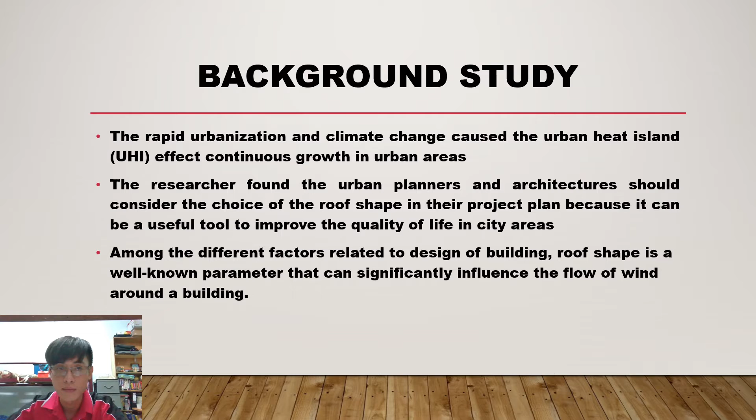For the problem statement, the urban heat island effect or heat stress is associated with the urban area due to continuous urbanization and global warming. There are many factors that can cause this urban heat island to happen.

Low wind speed occurs around buildings at pedestrian level due to higher packing density, so the released wind from buildings becomes lower. This is because the heat cannot release from the building, making it feel very hot, especially during the night.

That is the reason we have to consider that roof shape will contribute positively to the wind condition at the pedestrian level. So for the purpose of this study, the roof shape design towards pedestrian level wind speed will be taken as the main element in this research.

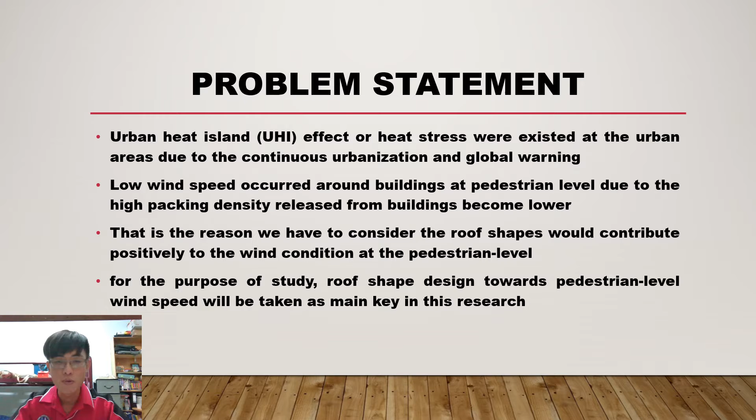For the rationale and significance of study, this study is necessary. It is with the purpose to determine the optimum design of roof shape toward the pedestrian level wind speed on multiple building areas and also isolated building areas.

This paper contributes to the area of research by exploring the roof shape application in order to improve the pedestrian level wind speed around buildings.

The most suitable design of roof shape can make a contribution to the field of construction because its benefits can improve air ventilation around buildings, mitigate heat stress and the urban heat island effect in tropical regions, and increase pedestrian level wind speed around buildings.

So after solving this problem, we can feel cool, and we don't feel as hot, especially in the afternoon or at night.

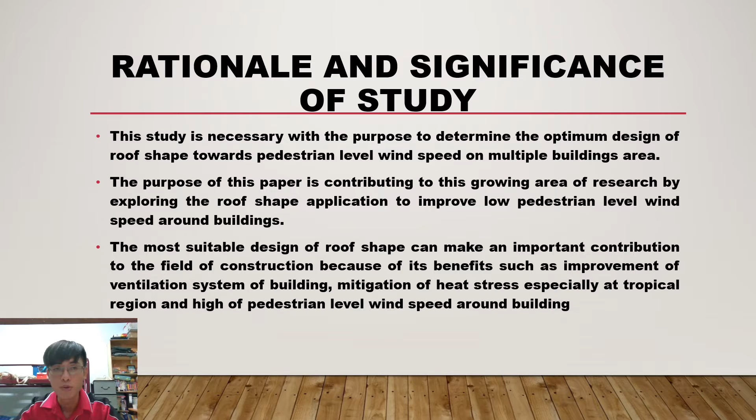For the objectives of the research, the first is to identify the roof shape design affecting pedestrian level wind speed. The second is to investigate the effect of different designs of roof shape towards pedestrian level wind on multiple building areas by simulation using CFD software.

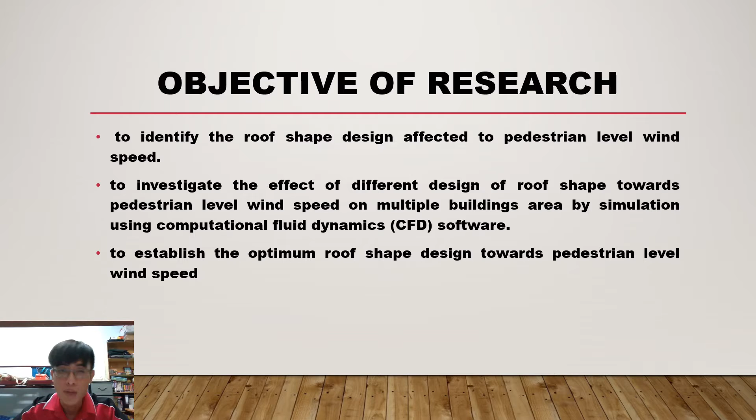The third is to establish the optimal roof shape design towards pedestrian level wind speed.

For the scope of study, we want to evaluate the effect of different roof shape designs on pedestrian level wind speed around educational buildings. So we have to do the analysis of different roof sheds on the building at the pedestrian level wind speed.

It is assumed that the standard K-epsilon turbulence model is adopted and 0 degrees for the simulations. In particular, the topographic map in this study is assumed to be a flat surface, and the static condition assumes no green environment and no human beings respectively.

The model scale for this study is not possible to explore the urban area at large scale. This is because of the requirement of advanced technology, such as higher computational cost.

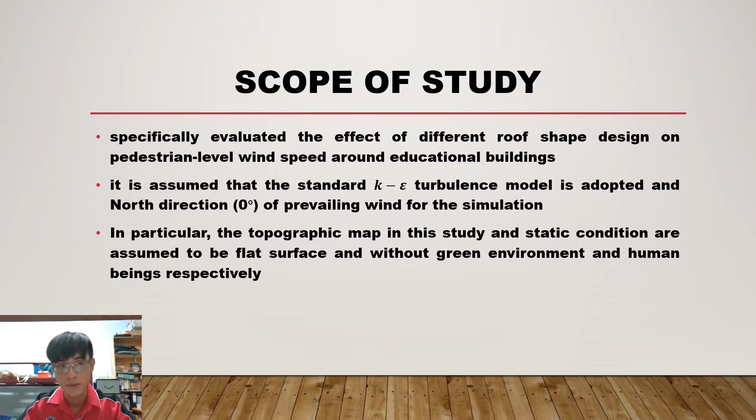For the literature review, we look at the advantages of roof shape to pedestrian level wind speed. First, the roof is an important element of building because it protects us from exposure to sun and rain. Therefore, a number of resources have reported that wind conditions around buildings at pedestrian level are affected by roof shape. From this, we know that roof shape can bring effect to the wind condition around buildings.

Research also concluded that roof shape significantly influences the flow topology and turbulence, meaning the wind direction and flow pattern around buildings. Based on the perspective of the urban wind environment, it has been established that the roof shape of a building distinctly affects the surrounding wind environment.

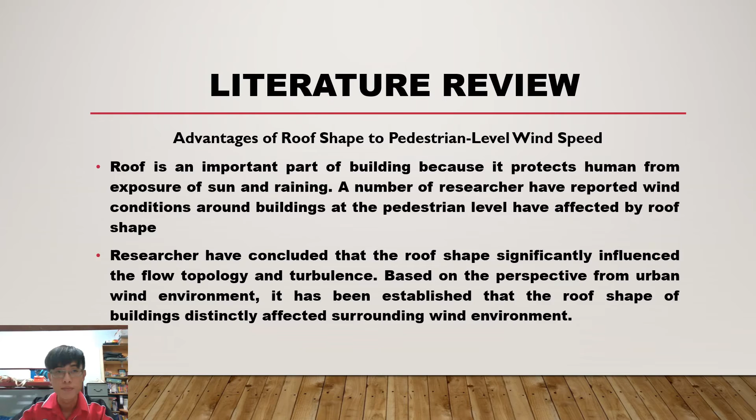So there are many types of roof shapes that can influence the pedestrian level wind speed. There are a few types of roof shapes that I found in the research.

The first one is the gable roof. A gable roof is a type of roof design where the wall slopes upwards towards the two sides, as shown in the diagram above. That enhances effective air exchange between buildings and increases the turbulent kinetic energy. By increasing the turbulent kinetic energy, the wind flow becomes higher.

It can improve the air ventilation between buildings. It has been reported that the performance of a gable roof with a critical roof angle of 45 degrees was the best option for ventilation compared to the flat roof. So it seems that the gable roof is better than the flat roof in improving air ventilation at pedestrian level.

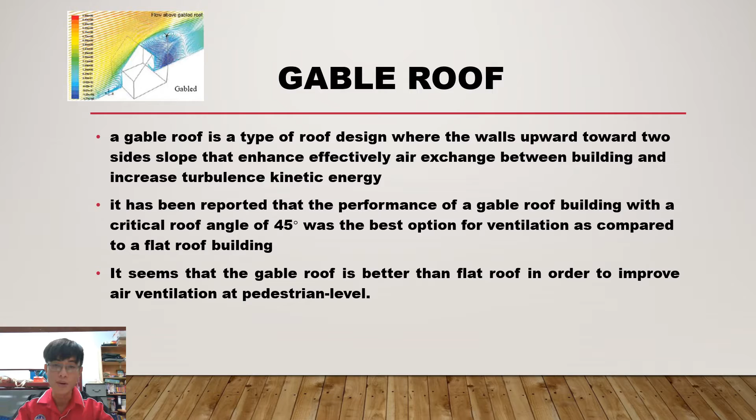So flat roof is another type that I found. Generally, flat roof or low slope roofs are commonly used for commercial buildings throughout the world. If we travel anywhere, we can find that flat roofs are common, along commercial buildings and other places.

It's concluded that flat roof buildings at street canyons can improve ventilation in urban areas. This is the conclusion from the research. Almost all previous studies used flat shape designs for their models in order to carry out the analysis of wind flow. This is also from previous studies.

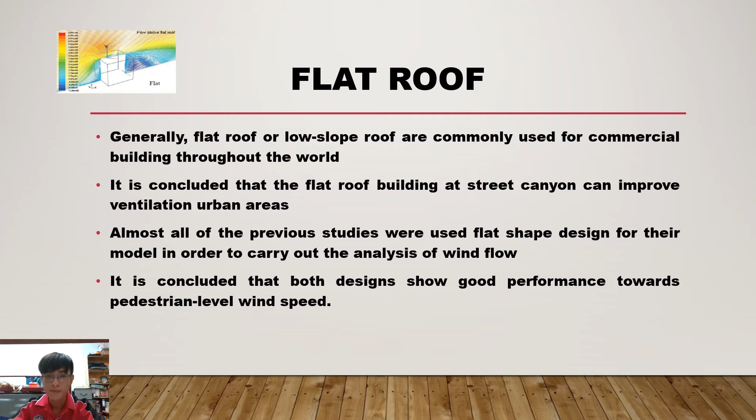So this is another type, which is a circle, and we call it a dome roof. Unfortunately, there are only a few published studies focused on the analysis of dome roofs. One research mentioned that a cylinder wall with a spherical roof was identified as the optimum shape for wind energy exploitation around buildings.

Another research concluded that ventilation flow becomes lower and lacks thermal comfort due to the increasing height of the dome shape. Based on these two research, their opinions are different. So it can be concluded the positive results were due to the data taken on top of the roof and not applied at pedestrian level wind speed.

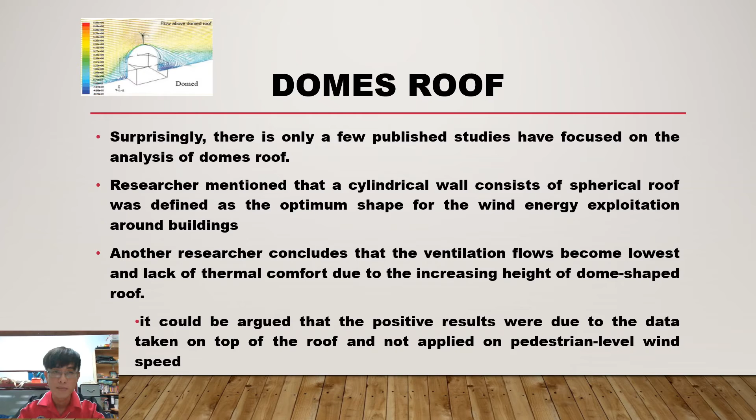Another type of roof we call a pitch roof, is a triangle, and is a type of roof comprising a sloping surface with an angle usually over 20 degrees. Prior studies concluded that pitch roofs can increase the rate of air exchange between the urban area and the outer flow in order to improve thermal comfort. There has been little agreement that pitch roofs can improve wind speed at pedestrian level, though this is due to only a few published studies having focused on this type of pitch roof.

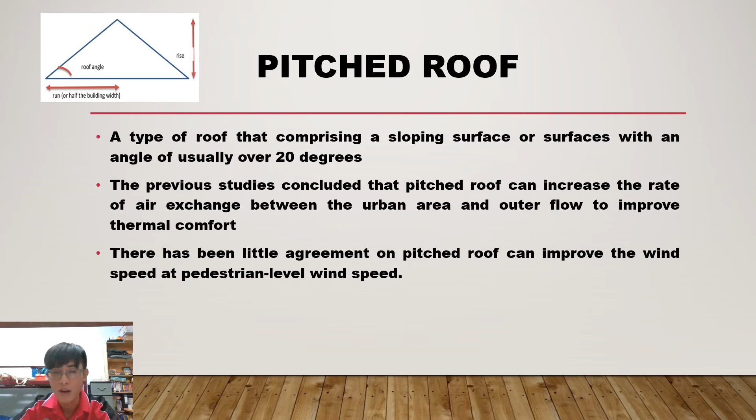This is another type, the step roof, where the surface on one side is higher than the other side. Based on table 2.1, which is the figure shown, it shows that the mean velocity of step roof is lower compared to the other two types, flat and gable. So we conclude that the performance of step roof is poor towards pedestrian level wind speed.

There is only a little research focused on this type of step roof. It would be more beneficial if more research focused on this type of roof shape in order to establish good performance towards pedestrian level wind speed.

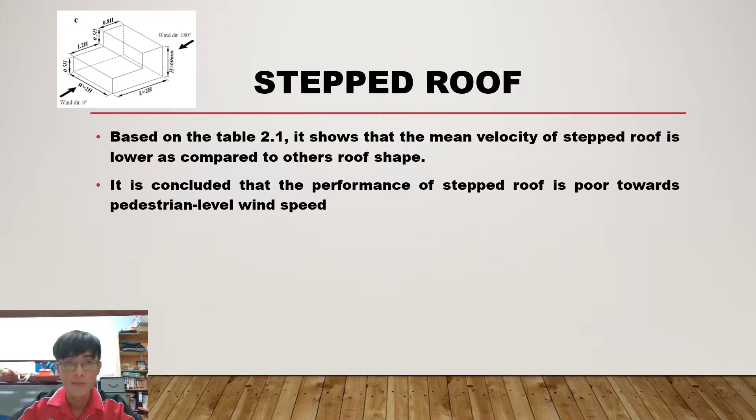This is another part from the literature review, the roof design parameter. There are basically four categories. The first one is building configurations and designs. Building configuration is defined as the overall size and shape of buildings. We can note that the roof shape of a building can be categorized in building configuration because it brings effect to the pedestrian level wind speed.

Recently, research has shown an increased interest in investigating the effect of height of a flat shape building on the pedestrian level wind flow. Another is the roof pitch slope design, which can influence the pedestrian level wind speed. Several studies have documented the analysis of wind flow around buildings with different degrees of roof pitch.

That shows the significant influence on the pedestrian level of building. It has been reported that the performance of a gable and pitch roof building with a critical roof pitch of 45 degrees was the best option to improve the pedestrian level wind speed.

The other factor is roof height, the rise-over-run ratio. In a study conducted by Hosseini 2017, it was shown that the presence of vortex and buoyant force occurs when the rise-run ratio, the roof height, is increased. The presence of buoyancy can lead to an increase in turbulence kinetic energy, which can improve air ventilation. There still needs to be more exploration of the rise-over-run ratio on pedestrian level wind speed, as only a few studies have focused on roof height.

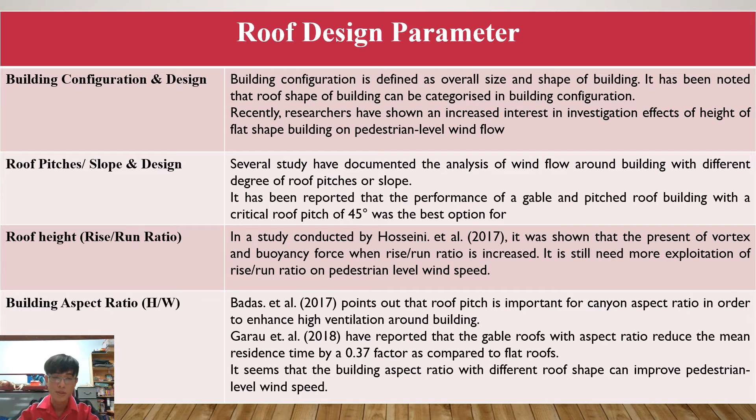The benefits of good roof shape design: the first is higher wind speed, or improved air ventilation. Hosseini's comparative study found that increasing the roof height and the presence of buoyant force can improve thermal comfort due to increased turbulence kinetic energy, raising wind speed around the building. Another study mentioned that flat roof buildings in a street canyon perform well to improve ventilation in urban areas.

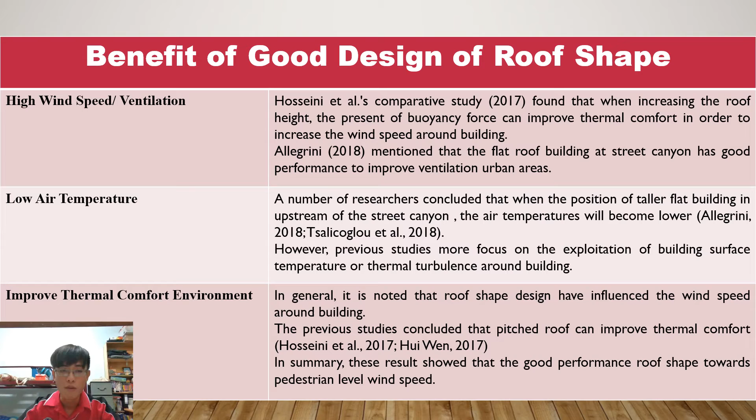Another advantage of good roof shape design is improved thermal comfort environment. In general, roof shape design can influence wind speed around buildings. Previous studies concluded that pitch roofs can improve thermal comfort, according to Hosseini and Hui Wen 2017. In summary, these results show the good performance effect on pedestrian level wind speed.

Pedestrian level wind speed, this is in chapter 2, the literature review. The key factor affecting pedestrian comfort is the wind environment surrounding the building. Moreover, Liu has reported that the mean wind velocity ratio is used to evaluate the wind environment at pedestrian level. The condition of surrounding wind at pedestrian level is affected by roof shape, so we know that roof shapes can bring effects to pedestrian level wind speed.

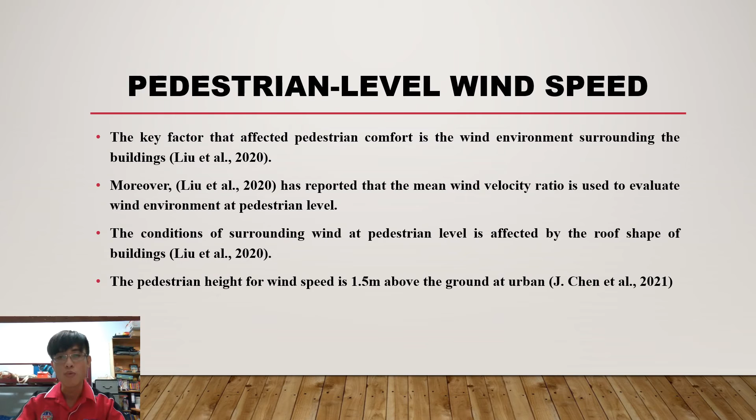The pedestrian height for wind speed is 1.5 meters above the ground in urban areas. So this is the pedestrian height, and we know that the limit is from 1.5 until 2 meters.

For computational fluid dynamics, in recent years CFD has successfully contributed to the application of wind flow around buildings by providing a suitable way for determining mean flow conditions. This shows that CFD has very good performance in predicting the analysis of velocity around the building, and it can also provide detailed data on energy levels around the building. So it is a powerful tool for the analysis of a building.

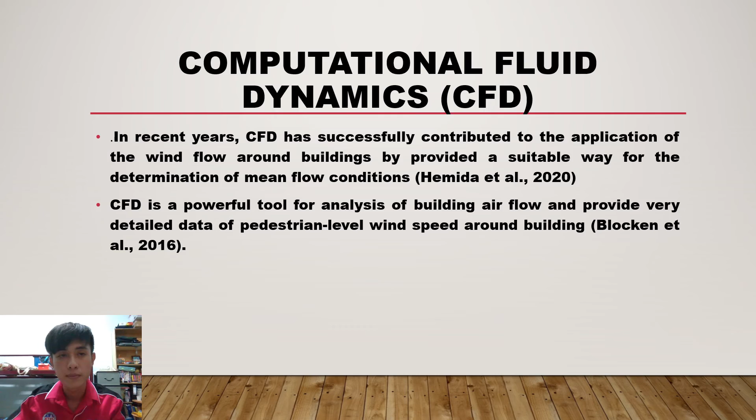For methodology, the figure below shows the methodology chart of the study. The first step is site selection, so we have to select the site for this study. I selected the campus Pagoh UTHM as my site to analyze the wind speed.

This is because the buildings at Pagoh, with their height, capacity, and building arrangement and shape, can be matched with urban areas. The next step is roof building identification, so based on the buildings at Pagoh, we have to identify the roof shape of the buildings.

For the building plan of the buildings at Pagoh, it is taken from the website WikiMap.

So the next step is to develop the 3D model. For this, we can use AutoCAD and also the Ansys Design Modeler in order to design the model of the building. For the simulation setup, we use the Ansys software to carry out the simulation.

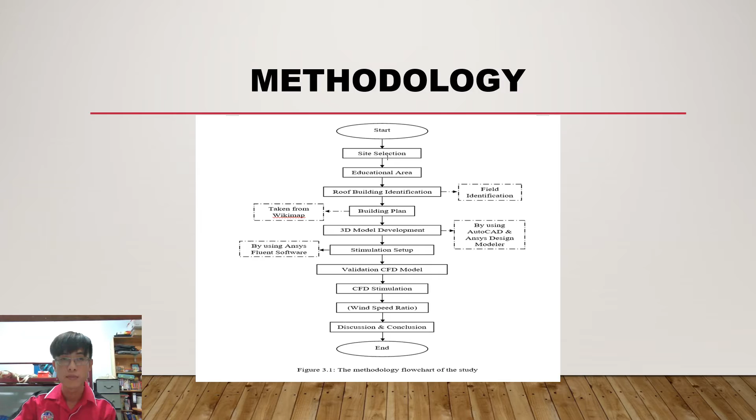As just mentioned, this is the simulation setup or guideline we have to follow in order to design our model. The first one is the domain size. The ratio of blockage should be below 3% when designing the size of the computational domain.

Before that, in order to determine the prediction of pedestrian level wind speed by using CFD simulation, this guideline should be used for the turbulence models. This is based on the result of a benchmark test. The guideline is proposed by the group of the Architectural Institute of Japan, AIJ, led by Yoshihide. So Japanese architects have designed this guideline for CFD simulation.

The second one is the grid resolutions. The building scale should be set at minimum to about 1/10 for the grid resolutions. For boundary condition, the outflow boundary around the building should be set far away from the area affected by the targeted building, in order to determine accurate results.

For turbulence models, some research reported that the realizable k-epsilon models were suitable for the prediction of velocity due to less computational cost and requirement of a smaller number of grid resolutions. So RANS k-epsilon models can provide very accurate data for prediction of velocity.

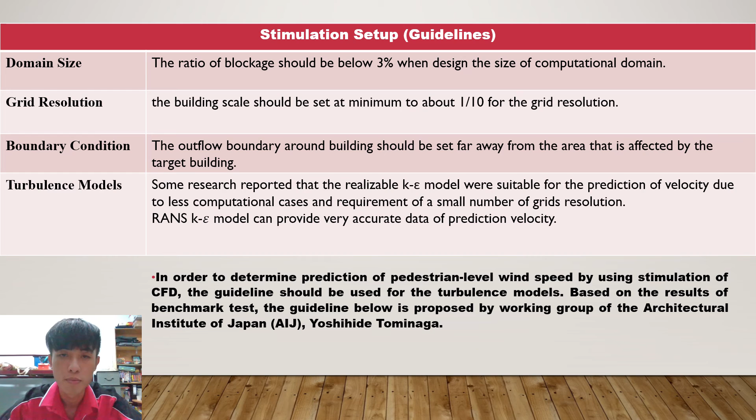So this is the validation of the CFD model based on the benchmark from the AIJ group. After getting our result from the CFD simulation, we have to compare it with this result.

This shows the diagram of the measurement points of a single building. For this project, we are going to carry out the analysis of wind speed at two types of buildings: the first one is the single or isolated building, and the other one is the multiple building. Based on this result, we will compare it with the data from this AIJ guideline.

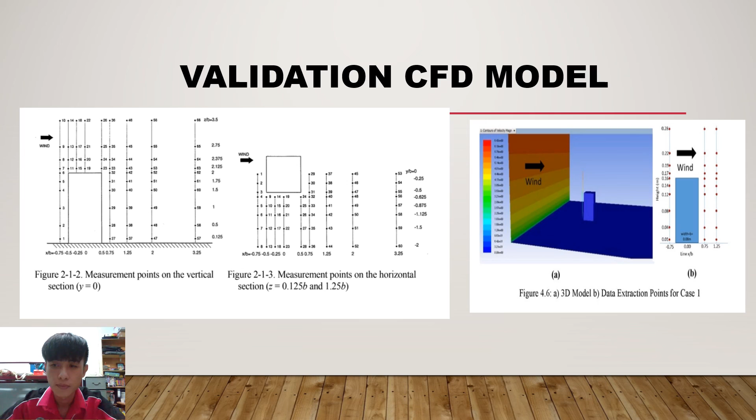This is another picture about the multiple building. You can see the arrangement and also the standard guideline.

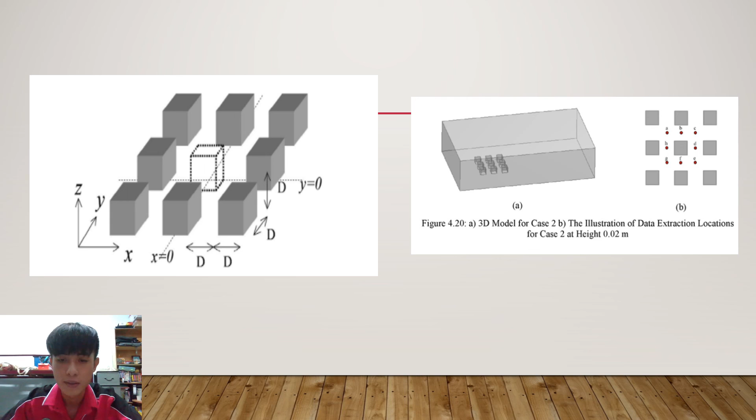For the expected result, based on the result from prior studies, it is found that roof shapes such as gable roof and pitch roof are commonly used for the prediction of wind speed and CFD simulation. The figure below shows the roof shapes: flat, gable, dome, pitch, step, and their effect on pedestrian level wind speeds.

For flat, it shows that the thermal effect of the roof and buoyant force inside the canyon cause the formation of vortex, which can lead to buoyant force and high kinetic, thermal buoyancy and turbulence, increasing the turbulence kinetic energy, which can improve air ventilation.

For the gable, by only increasing the slope of the roof, the vortex can perform better, which leads to higher turbulence kinetic energy near the roof surface.

For dome shape, the magnitude of the vortex decreases and produces low thermal buoyancy and turbulence. As a result, it shows poor performance for pedestrian level wind speeds.

For pitch roof, results show that a pitch roof with low pitch will reduce ventilation, causing wind velocity and turbulence to become lower. However, research concluded that the pitch roof can show good performance in wind flow and air exchange.

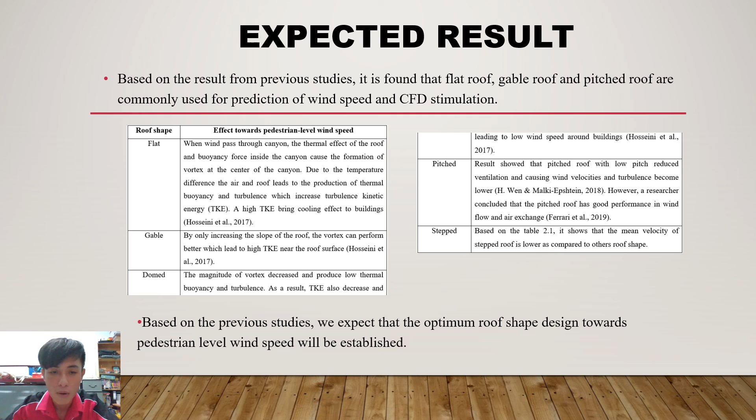So based on prior study, we expect that the optimal roof shape design toward pedestrian level wind speed will be established.